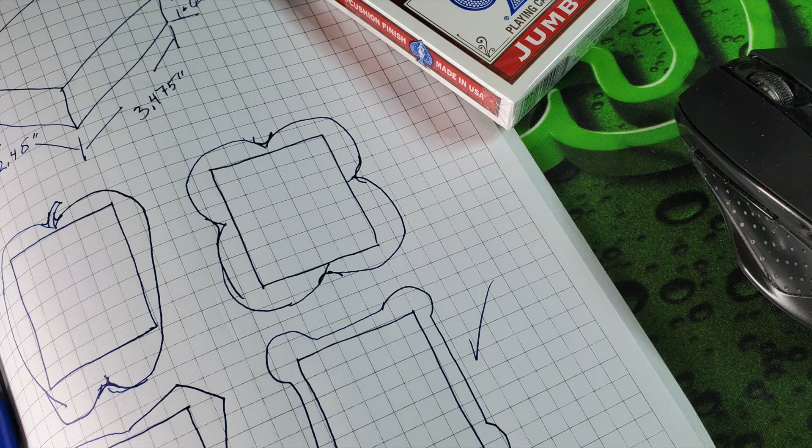We're working on our playing card holder right now, so most of you should have completed a series of sketches. If not, you need to get those to me as soon as possible. That being said, let's get going on making this on the computer.

You have three options. If you already started in Autodesk Inventor and you want to continue, that's fine. If you don't have a Mac or PC at home and only have a Chromebook, there's a program called Onshape that's all online you can try to use. If you're not in those two camps, this video will get you started.

We're going to start working on Fusion 360. It's an Autodesk program just like Inventor. It works on Macs and PCs, and it's free to download and free to use. Regardless of your situation, you need to watch this video because you need to see what we're doing so you can make it in the other programs. With that being said, let's go.

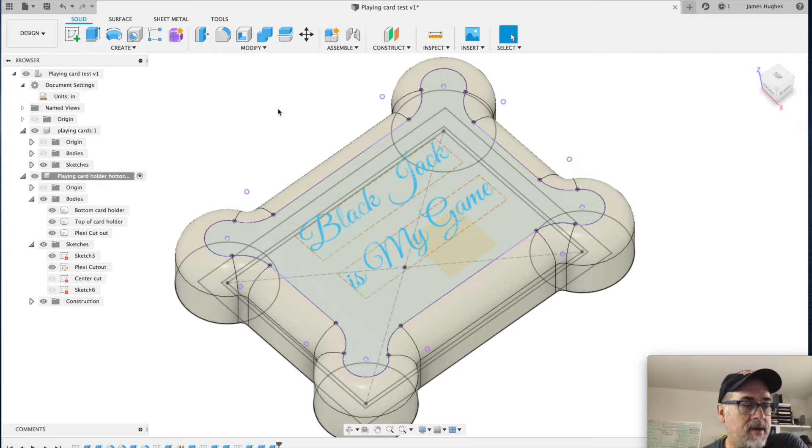Okay, today we're going to start to make the playing card holder. We're going to do this using a program called Fusion 360. We've been using Autodesk Inventor - they're both by the same company. So let's go ahead and see what we can get done.

This is my sample that I made. I'm going to show you how I made this. You can make yours like this if you want, or you can make it your own.

So we're going to start off by going File, New Design, and we're going to start with a sketch. We're going to go Create, but we need to make a new component first. Actually, let's go to Document Settings first. Units - I usually work in millimeters, but for this project we're going to be using inches. So we'll click change the active units to inch.

Now we can go Create New Component. We're going to name this component our playing cards. Say OK. And we're going to come up to the unsaved here, click on that, and we're going to go Create New Component a second time, and this one is going to be our playing card holder.

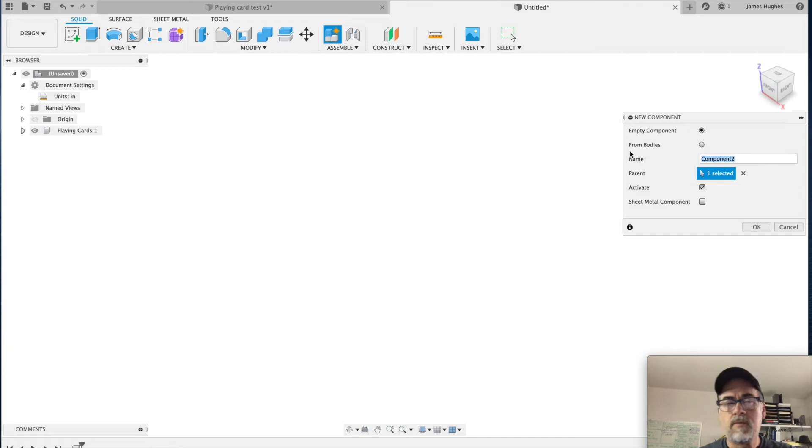All right, we're going to go into our playing card first. We're going to select it - see the little dot there? That activates that component. We just have the origin. We need to start off by going Create and Create Sketch, because we're going to create this from a sketch.

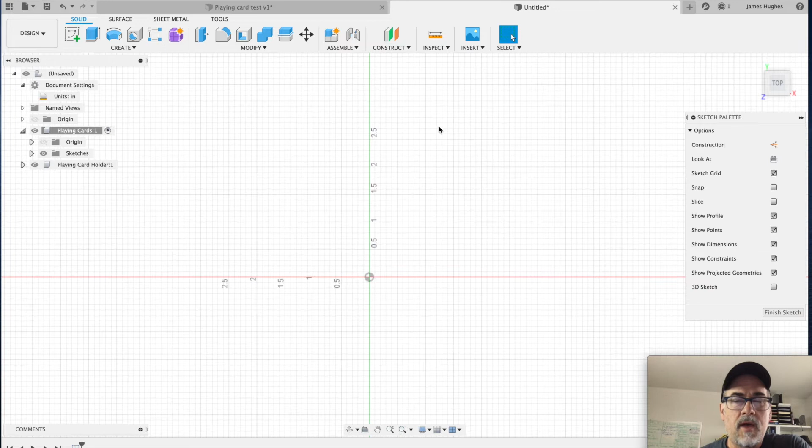We're going to select the Z plane, and we're going to make a center point rectangle - not center point circle, center point rectangle. If we come up here, you'll see there's a 2 point, but we can click Create, go to Rectangle, and go to Center Rectangle. We move our mouse over to the center, click, and drag out.

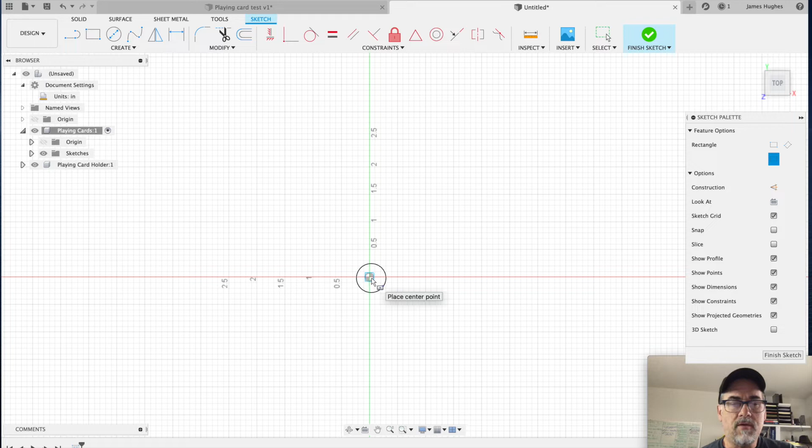Let's see, forgot to put my notebook. Have my notebook here with our specs. Our playing cards are 2.48 wide, so 2.48. And we hit tab and it goes to the other one. It's going to be 3.475 tall. I'm going to say OK, and then we're going to click Finish Sketch.

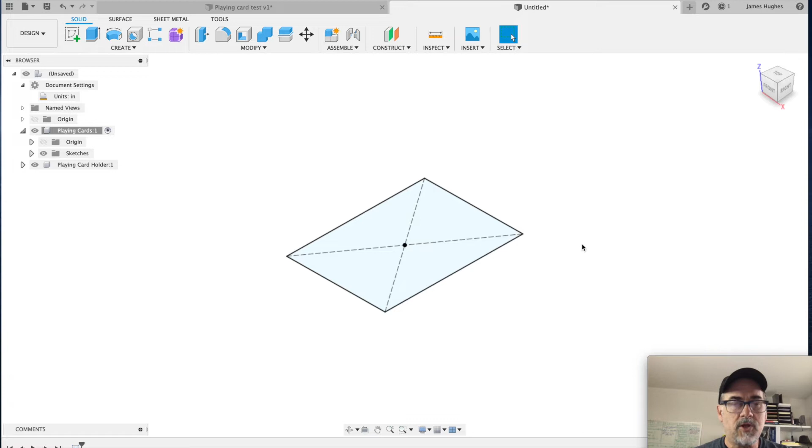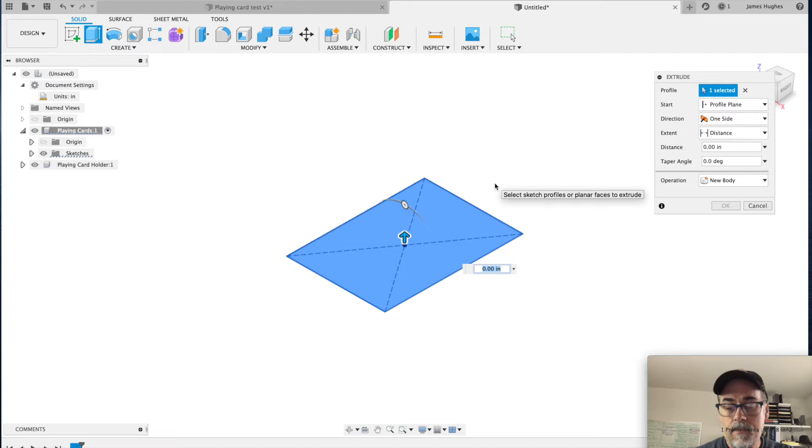Now that gives us a two-dimensional plane, but we need to make this 3 dimensions. So we're going to go to Create, and we're going to Extrude. You can also type the letter E. Since there's only one sketch, it realizes that's the thing we're going to extrude. We're going to extrude that 0.65 inches. Say OK, and when we do, it makes our extrusion and our sketch went away.

If we come over here into our playing cards component, we can see that the eyeball just got turned off. We can turn it back on if we want, but we really don't need that.

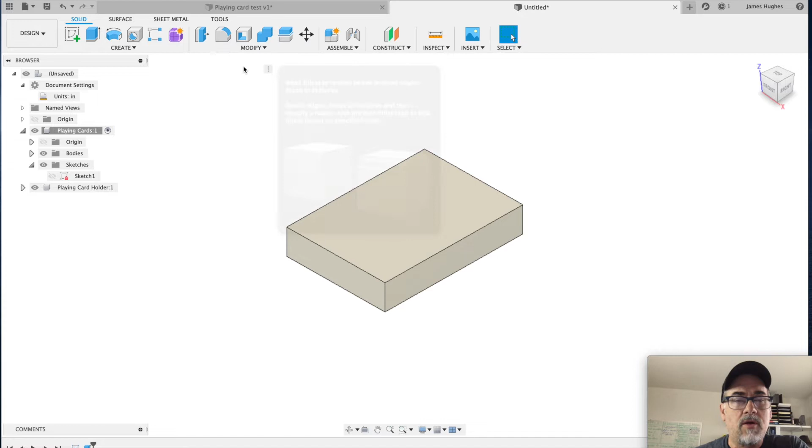Since playing cards aren't square on the corners, we're going to round those off, and we're going to be using a 1/8 inch end mill, so we'll use 1/8 as our rounding radius. We're going to do that by going Modify, and we're going to make a fillet. A fillet makes a round corner. So we're going to click fillet, and then we're going to select the corners.

Notice I can grab a face, I can grab an edge. We want to grab the vertical edges all the way around. Notice how I can select through just by holding it over. We get all 4 of these.

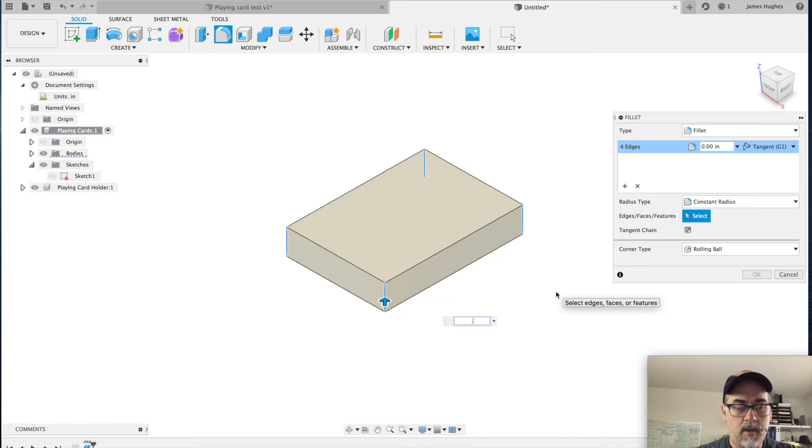Come up here and we got 4 edges. We want to make that 0.125, which is an 1/8. Hit return. Now if we look from the top, we see that our corners are rounded.

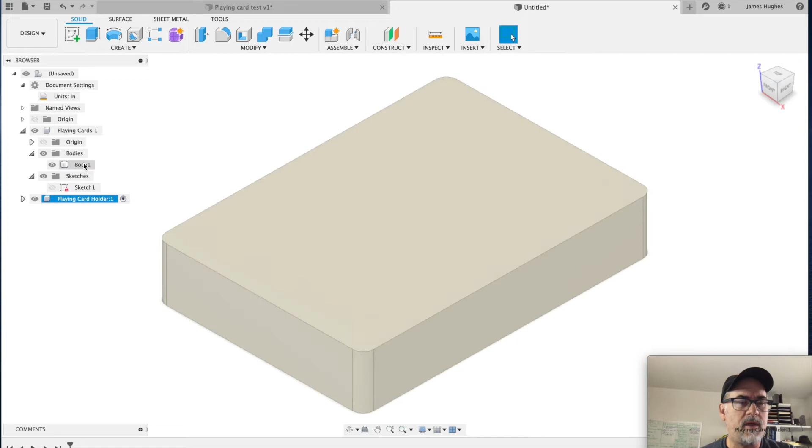We'll go back to our home view. Next thing we need to do, we've got our playing cards done. We're going to go to our playing card holder and activate that, and turn off the body one. Let's give it a name while we're here. We're going to double click on it and call that playing cards.

So we know that's what that is. We can then turn off that view, click away. We're still active in our playing card holder. We only have the origin, we don't have any of these other things. So let's go ahead and shrink those up. Actually, let's just get rid of the whole thing.

Now we're going to do the same thing. We're going to create a new sketch, but instead of going up to create, we're going to try this. We're going to go S, which is shortcut design shortcuts. I have center rectangle, and notice if you didn't have all these and you don't have the one you're looking for, it pops up and you can just type in search. So you could type in rectangle and get the center rectangle.

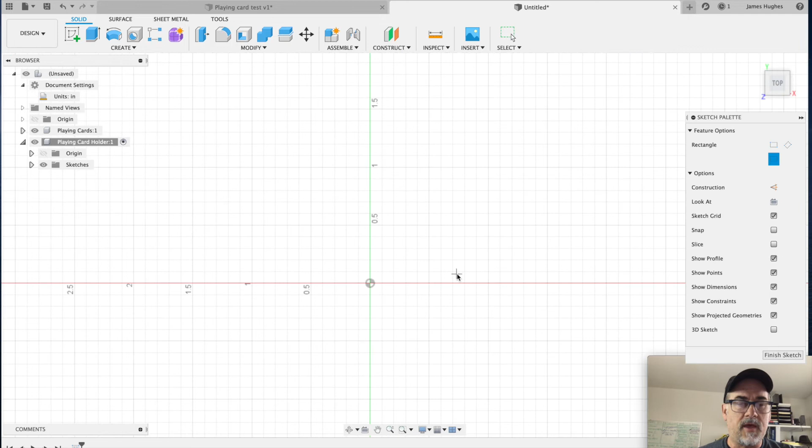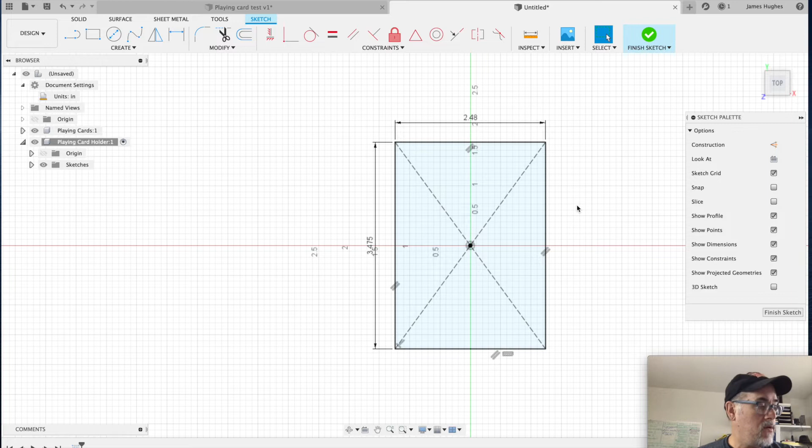We're going to click on the Z plane again. We're going to go to the center and draw basically that same shape. So it's 2.48 by 3.475. Enter. Now, we can't make the hole for the cards the same size as the cards themselves, otherwise they won't fit.

We need to add something called tolerance. Tolerance is just a little extra space so that things can move. Now to do that, it's real simple. If we look up here in our modify tool, we can already see what we need. It's the offset, so we click on offset.

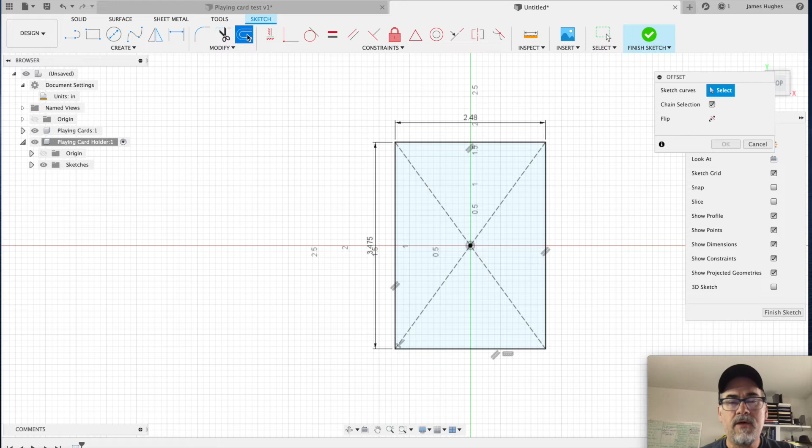We're going to click on our rectangle, and it selected all of it. If it hadn't, we could select it all. But it wants to make it go in, and we want it to go out because we want to give room for the cards, we don't want to make it smaller. So that means it needs to be negative. We're going to go negative 0.05, and we'll make that a little bigger.

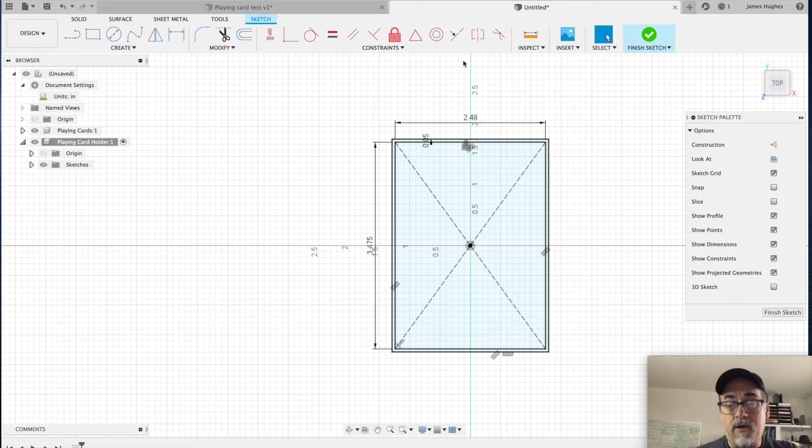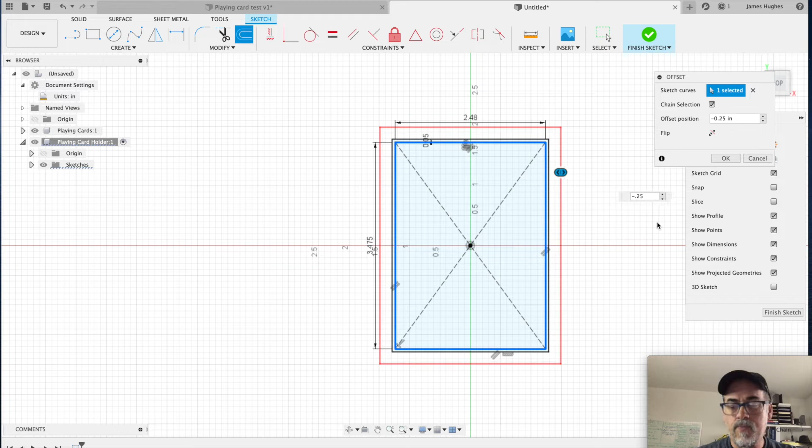Now, really good, we've got our hole. We're going to use that as our hole, but we need to add a few things to it. We have no walls, no wall thickness, so we're going to do the same thing, but this time we're going to try S, and we see our offset right there. We're going to click the same one, and this time go negative, and make this 1/4 inch, 0.25.

And now we've got that. In the one I made, if we click back here, you can see it's got the round corners, so we're going to add those. But before, let's go ahead and add those. So those, we're going to do the same thing, type S.

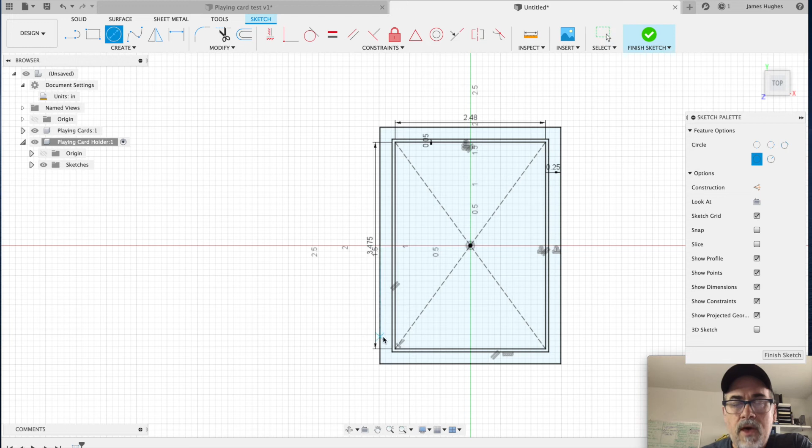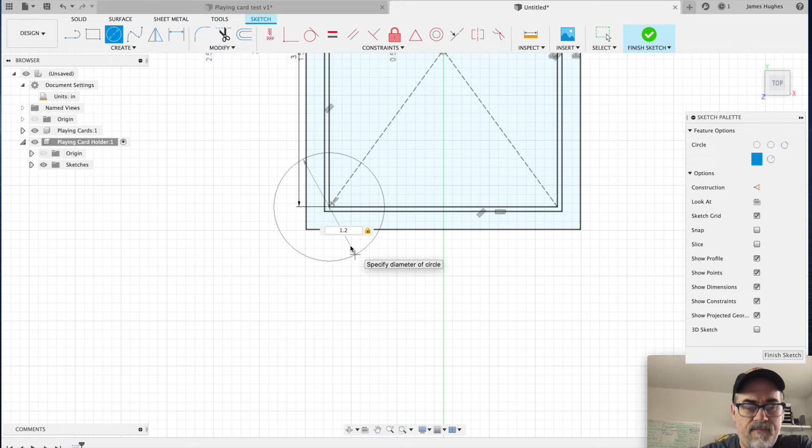We're going to find our center diameter circle, and put it in the lower left corner of our original square if we zoom in. We just click, and it will allow us to zoom to start the circle. We're going to make this 1 1/4 inch diameter on our circle, and hit return.

Great, now we have 1, but we need 3 more. How do we do that? We could draw the individual circles on each one of these, but we're going to use something that's a little more fun and a little more exciting. We're going to go S, and it doesn't show up in our shortcuts.

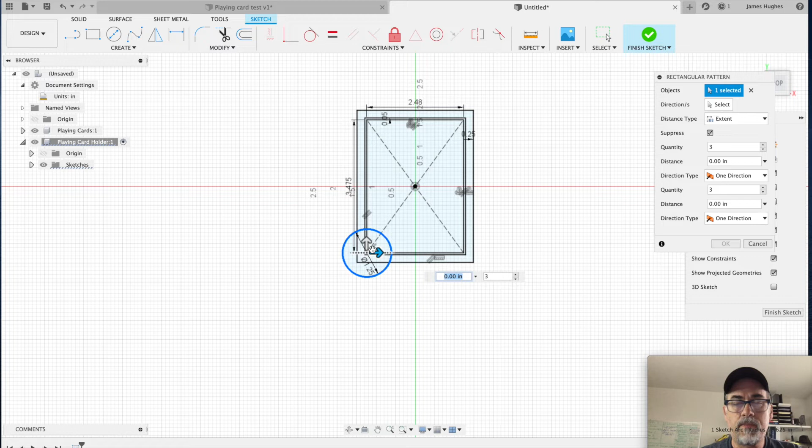So we're going to type PATT because we're going to go pattern. You'll notice we want a rectangular pattern. There's two patterns. Typically when they show you more than one, the first one is for sketch, the second is for bodies. Well, we're in a sketch, so we're going to take the first one and click on it. Look over here, we got one object selected.

That's all we want. We're going to make it come across to the other side. Now you'll notice it's giving me 3. Well, that's its default, we only want 2. And we need to make this distance, since we're going from corner to corner and we know what that distance is, we're going to make that 2.48. Then we're going to click on our up arrow.

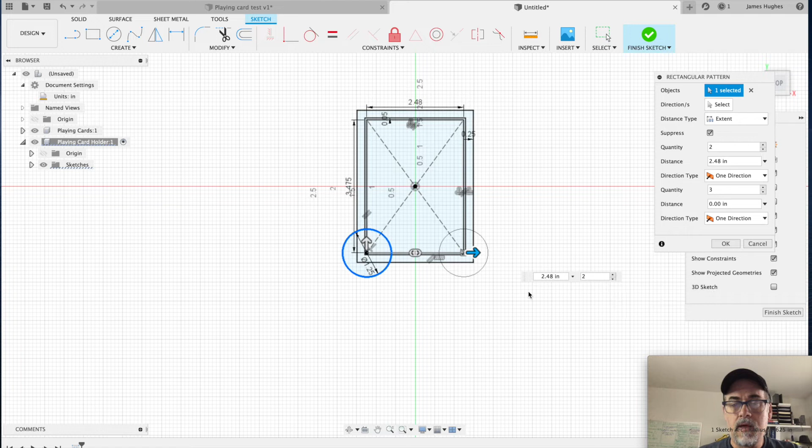We're going to do the same thing, but again it's giving us 3 because it's its default. We're going to go down to 2, and we're going to make this 3.475.

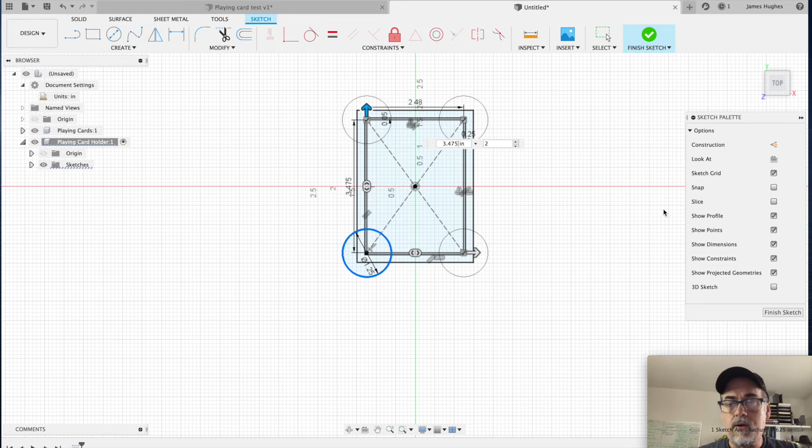I'm just going to type that in. Now we let that finish. Cool, we're good to go. We've got our basic shape.

We're going to click Finish Sketch, and then bring that up. We need to draw the bottom.

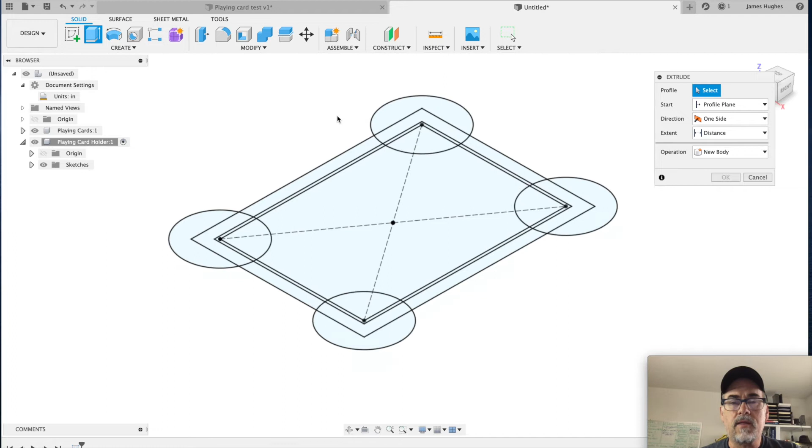So we're going to start extruding. Now we could create an extrude, or we can just type the letter E. We want to select everything, so the easiest way to do that right now is to just draw a rectangle around it.

We're going to make that 1/8 of an inch tall. So we're going to type 0.125, and hit return or enter, and that gives us our base.

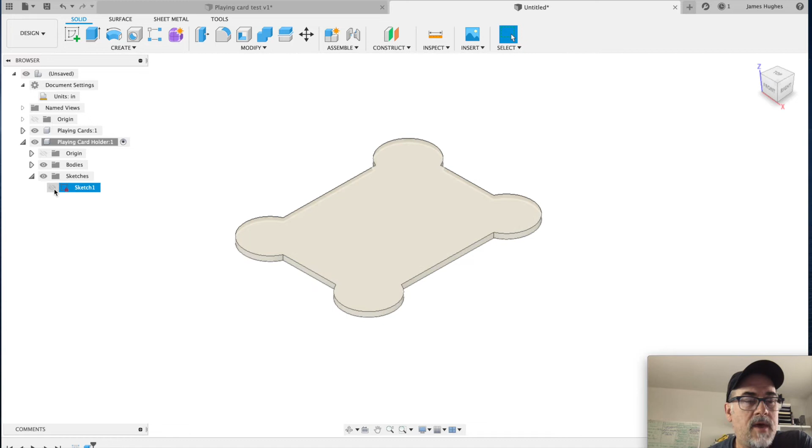But what happened? Our sketch went away. No problem, we just click on the triangle, go down to the sketch, and we're good to go again.

Now we want to extrude more, but we want to extrude through this. So what are we going to do? We want, if we look at our original here, let's turn off the top and the plexi cutout and our sketches.

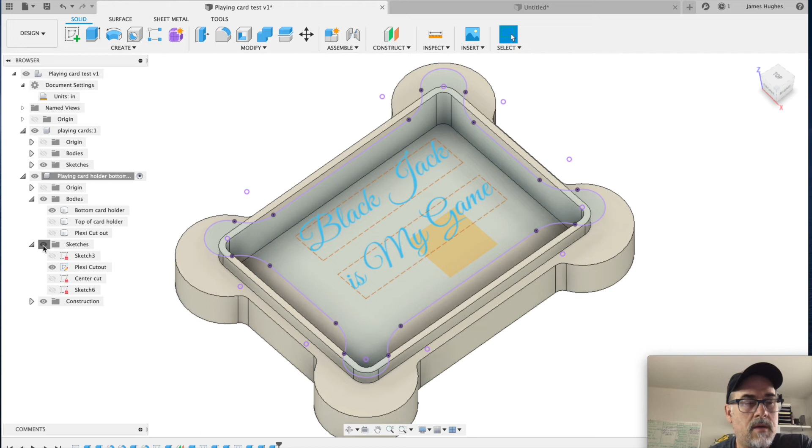Let's just turn out. There we go. Now we can see that we want to bring up. Actually, let's go ahead and put the top on, because we want to do this all in one piece, and then we'll come back and cut it.

So we're going to bring it up, and then we're going to round off the tops. Let's go back here. We don't want to bring up the part in the center, so we're going to go E for extrude.

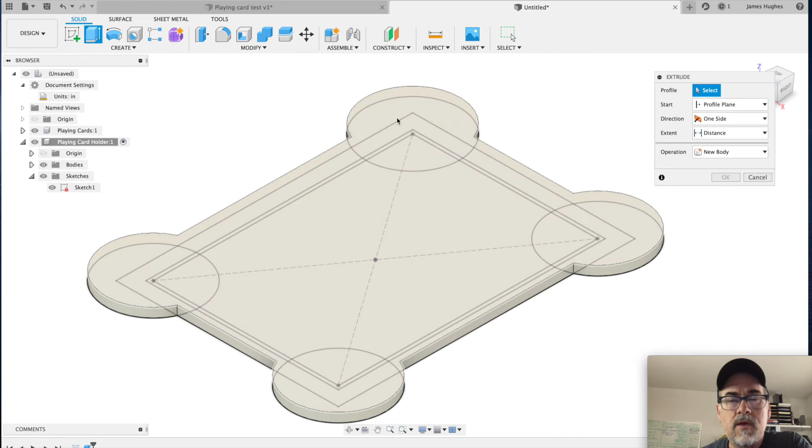I'm going to click and hold, and then you get the option. I can click there. Well, that's going to take a lot of clicking and holding, so it's probably easier just to rotate this upside down, and we can come in here and grab all the parts that we want, which is just the outsides.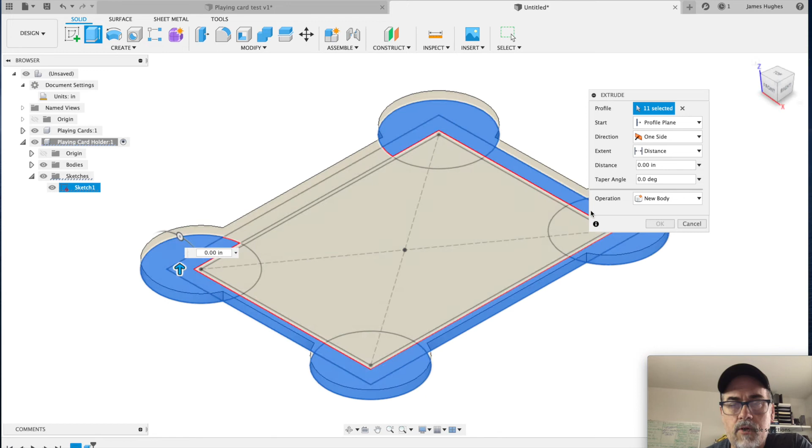We don't want that inner part. There we go, so we got all those. Go back to our view. We're going to bring them up.

Now notice, oh, we missed a part, so we're going to hit cancel, type E for extrude. Let's go back underneath, let's get all the parts this time. Let's do the center parts first, or the rectangle first. Make sure we have it all, and then we can get the 4 corners.

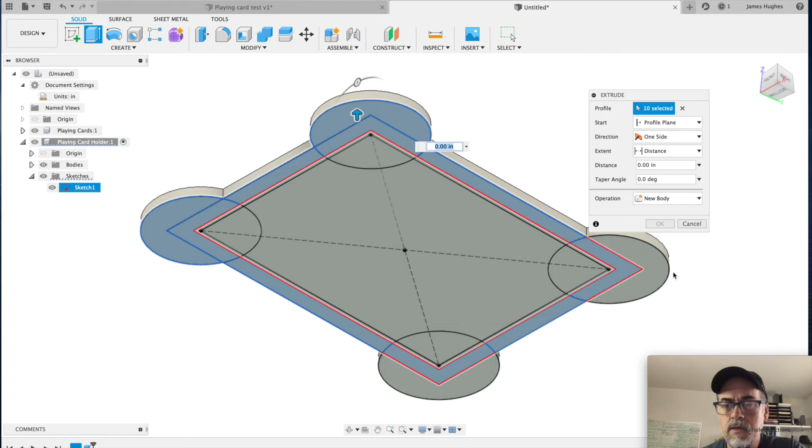And we'll go back. Now this we're going to want to extrude up. We need to make it 1/8 of an inch plus 0.65.

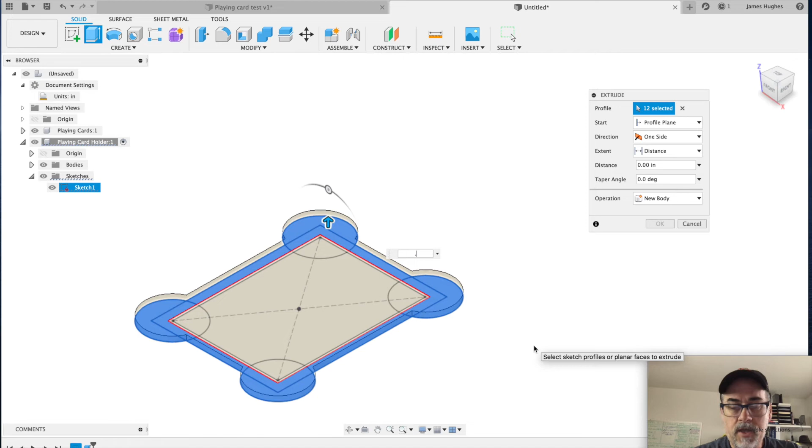So we're going to go, we could try and do the math, but we can let it do the math for us. So we're going to type 0.65 plus 0.125, takes it up another 1/8, but it's red, which means it's going to cut.

So we don't want to cut. We want to come over here to our operation in our window. We're going to change that to join, and we're going to say okay.

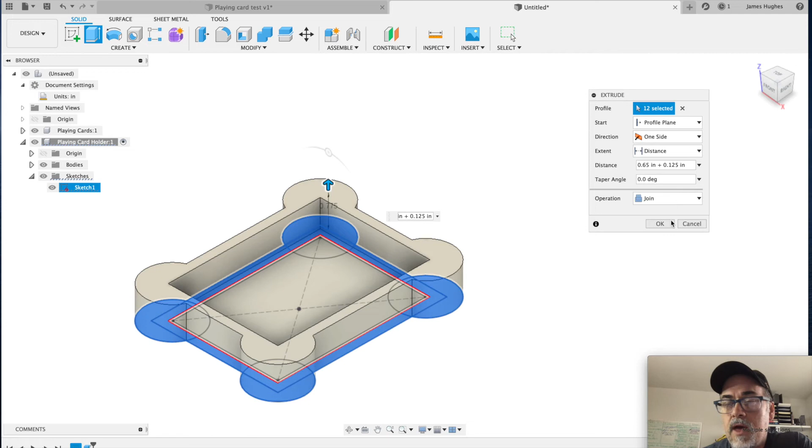Now we need to make it, actually that was 1/8 plus 0.625. So now the top of the cards would be right here. We didn't come up far enough.

Let's go ahead and extrude it. We're going to extrude another 0.25, so we got a 1/4 inch on top.

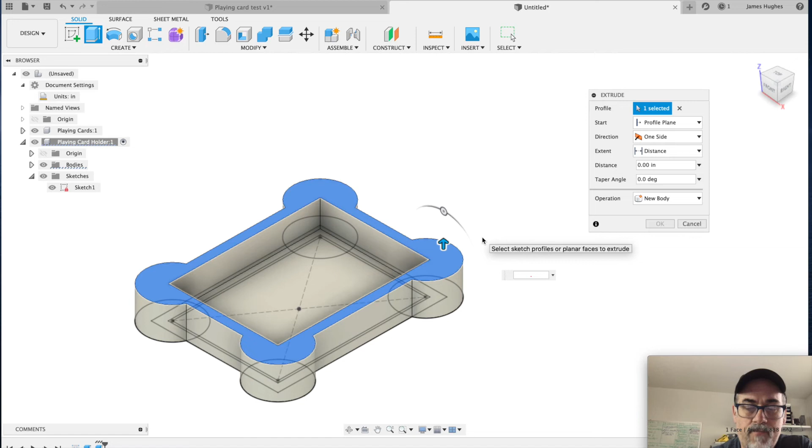Actually, no, we're going to do an 1/8 because we're going to use 1/8 inch plexi. So 0.125. And that brings us up another 1/8, and we're good to go.

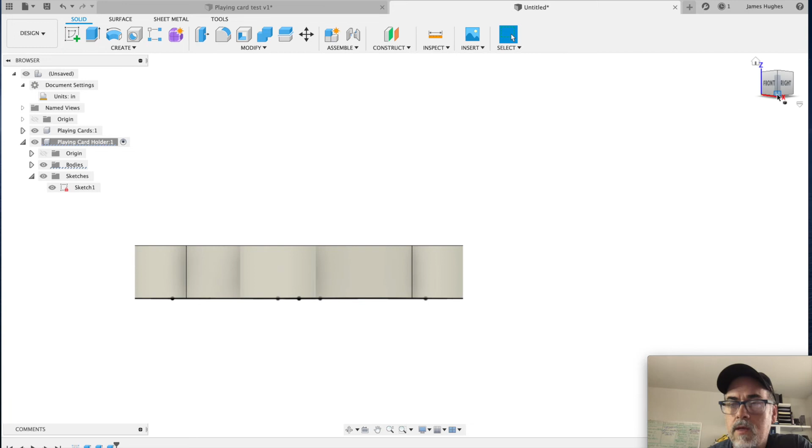Now we don't have a top. How are we going to fill this in? Really simple, we're going to go back to the bottom, and we're going to type E for extrude.

And this time, what we're going to extrude is that center part. So we're going to go around, and select everything that we didn't select before, because we're going to put the roof on this thing.

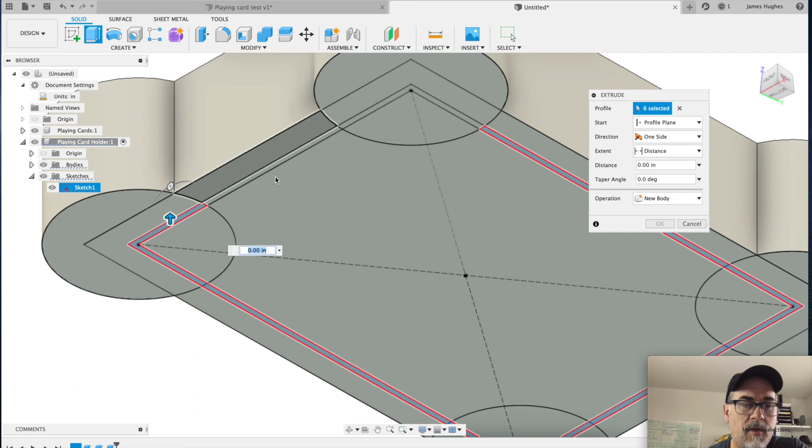So I'm just going to go around and select the squares, make sure I got all the squares. Then I can do the corners, and finally that centerpiece. So I should have 13. Okay, that makes sense.

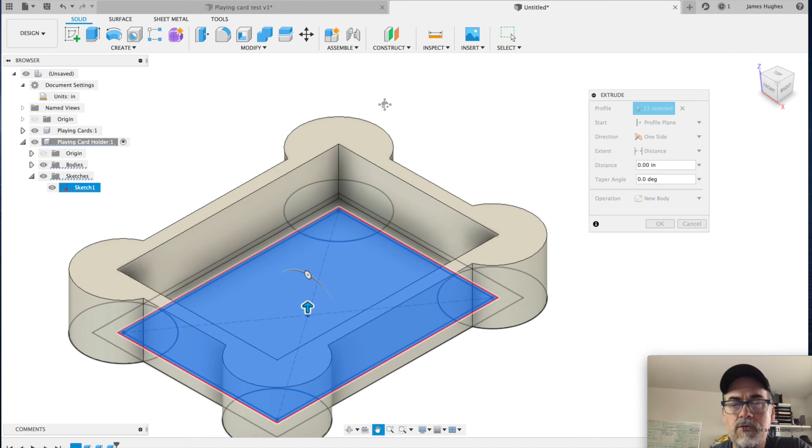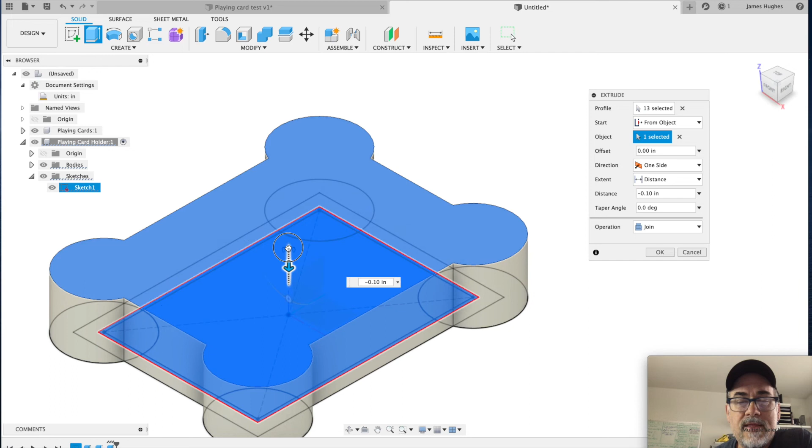There's an odd one there, 13. Now we don't want to start extruding from the bottom, because that will cut or join, and we don't want to join all the way up, because that'll just fill in our box. So instead of starting from the profile plane, we're going to start from object. We'll click on the top, and this time extrude down, going negative 0.125, down 1/8, and join for our operation, then say okay.

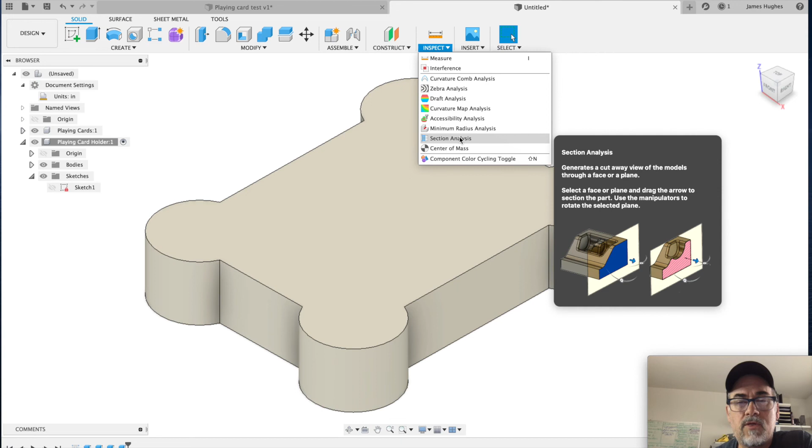Now let's turn our sketch off so it's easier to see. But how do we know if we got it right? We'll go up to our inspect tool, go to section analysis, click and hold, and wait until we see the XZ plane. You can see it's basically cutting it in half, and it looks good.

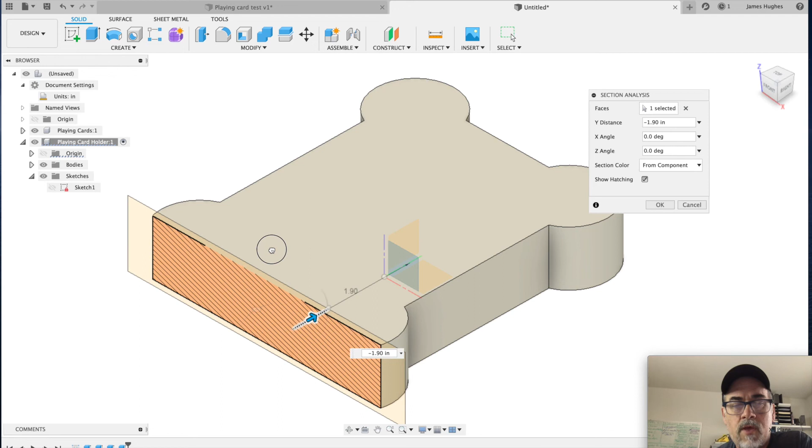But I noticed we forgot one thing - we still have a rectangle in there. So we're going to hit cancel, and let's see if we can do this without looking inside.

F for fillet, and we're going to find those verticals. Not that one, not that one. There it is, and there. And we're going to type 0.125, because that's the radius of our end mill. So we'll say OK.

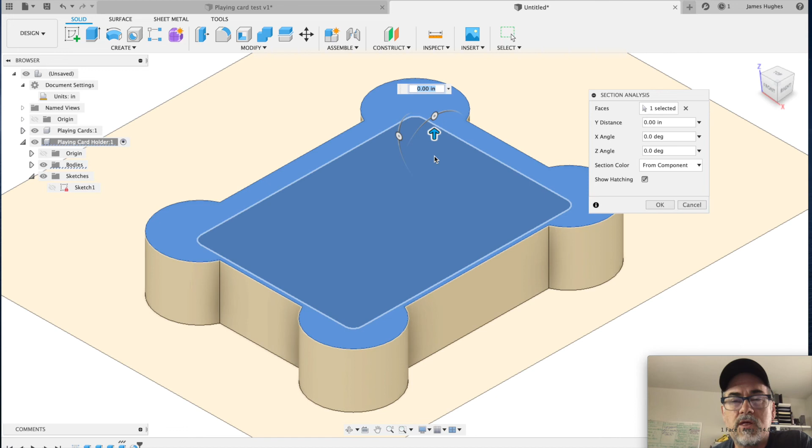We're going to come back to inspect, section analysis, and this time just select the face on top, because we want to come down and see that we in fact got the right corners, and we have it set. Perfect.

Now, last thing we're going to do in this video, and then we'll pick up next week once you get to this point - I really think you should do your own shapes, but if you want to do this one, that's fine. We need to do a couple things.

We can't get this hard edge on the outside because we're using an 1/8 inch end mill, so we need to fillet some more. We're going to click fillet and click on these verticals. If you want, you can rotate it around - I've just gotten comfortable doing it this way.

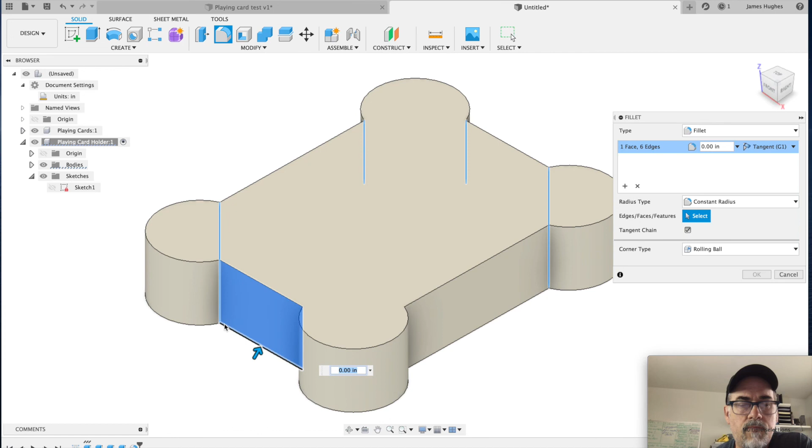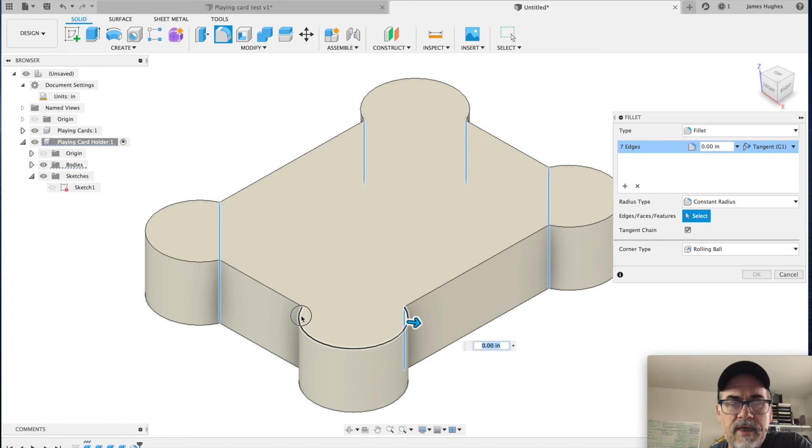Oop, I selected something I shouldn't have, so we're going to hit cancel and try fillet again. There we go. Sometimes when they're right on top of each other like that, it's hard, so you may need to move it or select it in the right order. Click and click. Now these - there we go, we have 8 edges. Perfect.

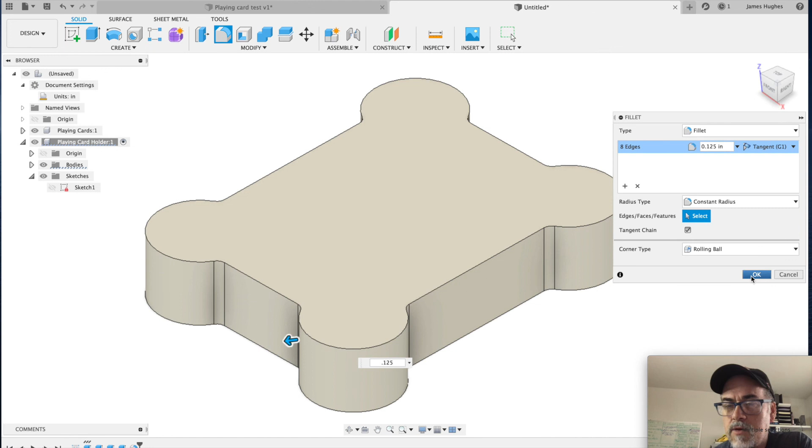These we need to also do the 0.125, because that's our end mill. And what that'll do is make that corner on the inside rounded. You can see this rounded corner. Say okay. So now we know that we'll be able to get that whole shape with the end mill.

Now we need to do one more thing, and we'll be done for today. If you want to continue on, you can play, but we'll try and keep this short. We're going to go F for fillet again, and click on the top.

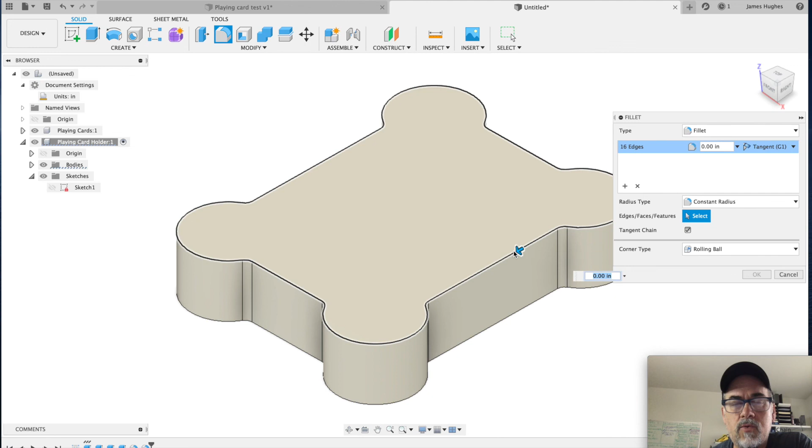Now if we push this in, we see that if we get too far, it'll actually break, number one, but it'll also start carving into that part in the middle. We don't want to go that far. So let's do this - 0.375 - and say okay.

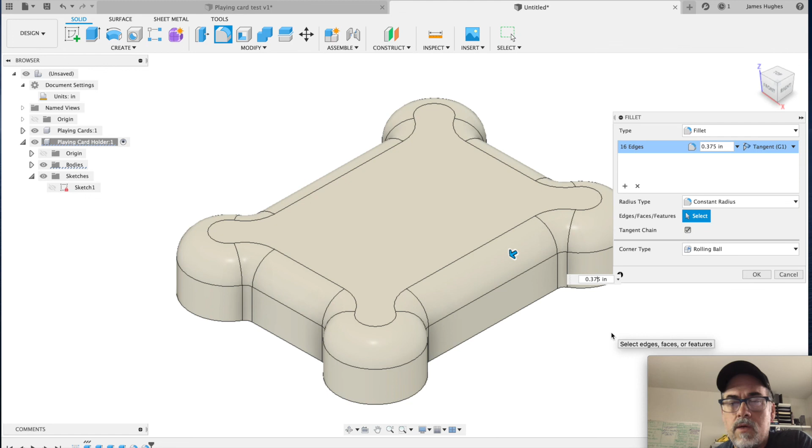And now if you look at this, you'll notice that it's rounded on those corners. So we've got a shape very similar to this one. If we would, let's put, okay. And we should be on our way.

Just a real quick one here. Sorry, I thought we were done, but we need to do something. Notice that this says untitled. So what we need to do is go to File and Save.

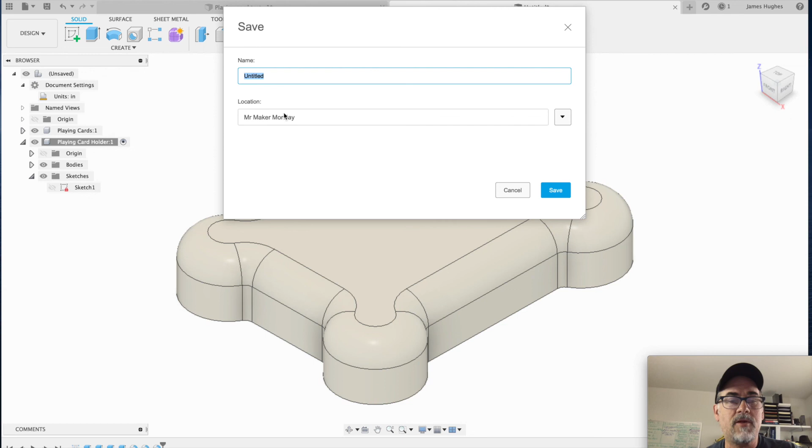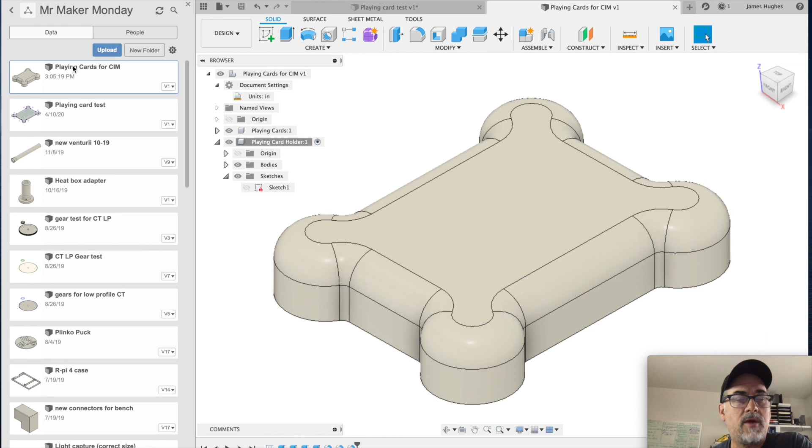Now you'll eventually get different folders. I'm going to leave it in my Mr. Maker Monday folder. We're going to call this one Playing Cards for CIM, and I'm going to hit Save. You'll notice it saves it there. Now if we click on this little Show Data panel, you'll see we've got a bunch of stuff here. You can always get to it. All right, so now that that's been saved, we are good to go.